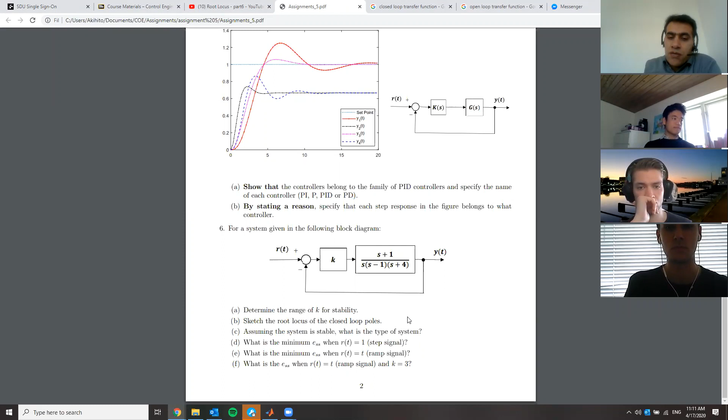So as long as the system is stable, the type is the same. Yes. What we should make sure is that the system is stable. But if we know that the system is stable, then it's not a matter of K. It depends on the zeros and poles. So I don't want to give you the answer, but it's not related to K. Okay.

Another question, I was just solving this one right before. When the system is marginally stable, the locus, does it cross the j omega axis? Yes. Okay. Just one. Yeah. And by the way, can you scroll up? Because you have it open.

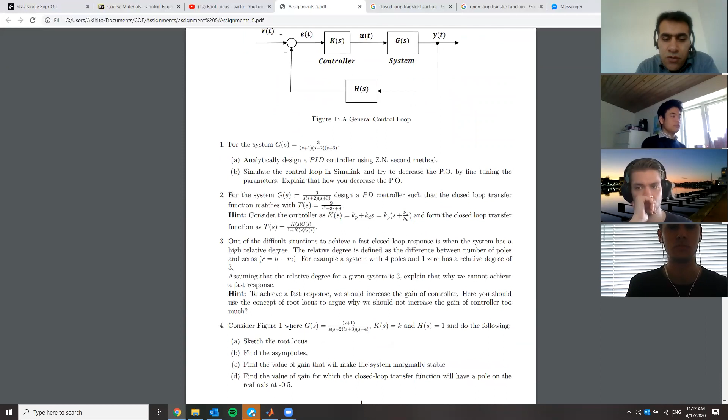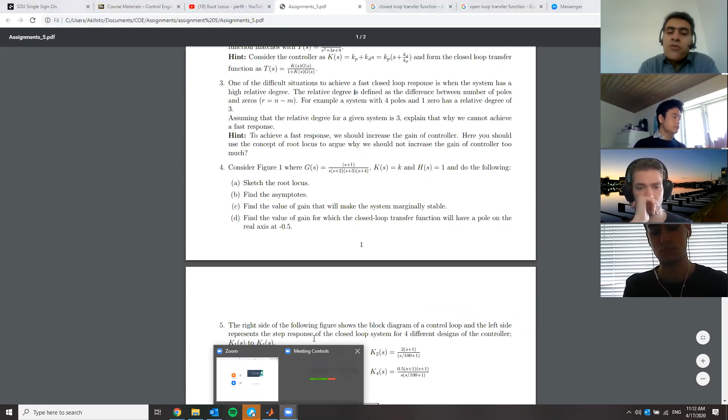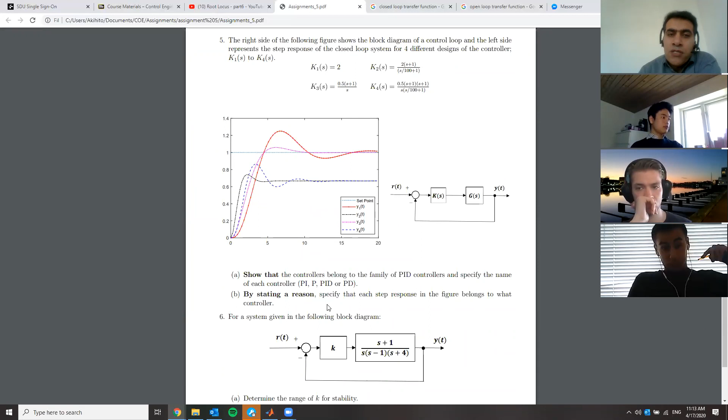The first question was one of the questions of a final examination. I don't know what year. The same for question 2. Not question 3. 1 and 2 were in the final examination. Also 4. And if you scroll down, yep. Also 5 and also 6. So other than 3, the other questions were in the final examinations of past years. Okay. Just to give you an idea how the examination looked like.

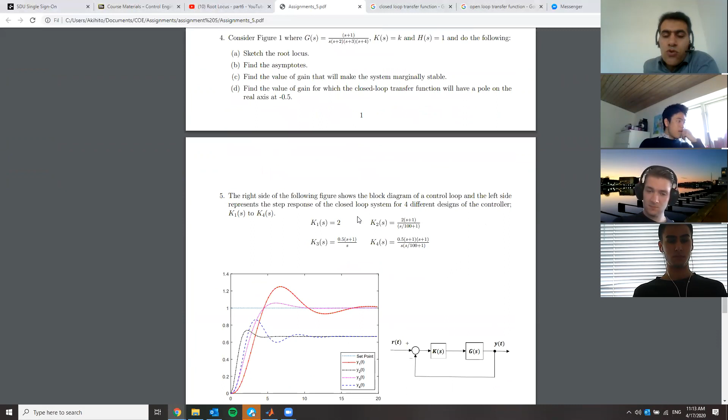For question 1, can I just use root locus to find where it passes the jω axis? Yeah, you can. Okay, thank you. You don't need to draw the root locus, but if you want, you are welcome. Okay, thank you. Can it also be done by trial? I mean, I tried a couple values of K and I found... No, you shouldn't do that, because analytically means that you should solve it on paper, theoretically.

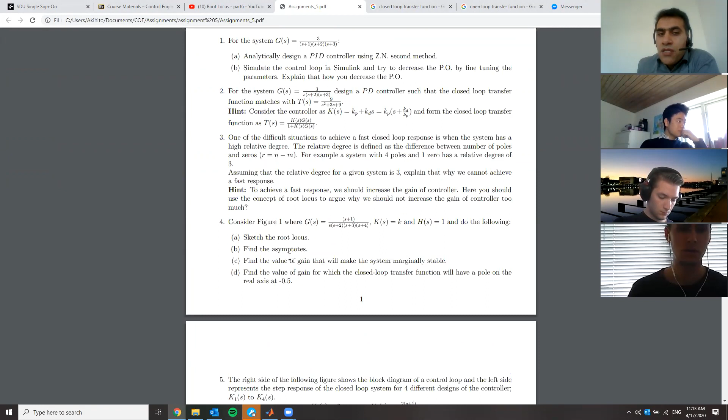Yeah, I did the question on paper, but then for the value of K, I tried a couple values and I got it. But this is not analytically. This is by simulation. Part A, when it says analytically, it means that you should solve it on paper, theoretically, using the Routh table or the other method I showed. Yeah, but for that we need to find the value of Ku, which is when we have a pure sine wave. Okay. And to do that, we need to test until we get a sine wave.

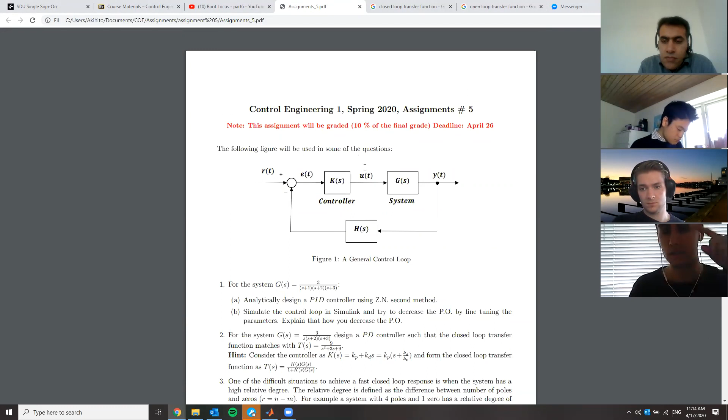No. This is what I'm trying to say. There are two different methods to find that pure sine. One of them is theoretical. It means that you go and find the K such that two poles are on the j omega axis. If the poles are on the j omega axis, for sure the step response would be a pure sine. Okay. For yourself, you can test it just to make sure it is okay, but you don't need to. And the other method is by simulation or by experiment, but this question is asking you to do it theoretically.

Okay. So just to make sure, the wave will become a sinusoid when the poles are on the j omega axis, no? Yes, it does if the other poles of the closed loop transfer function are on the left side. Okay.

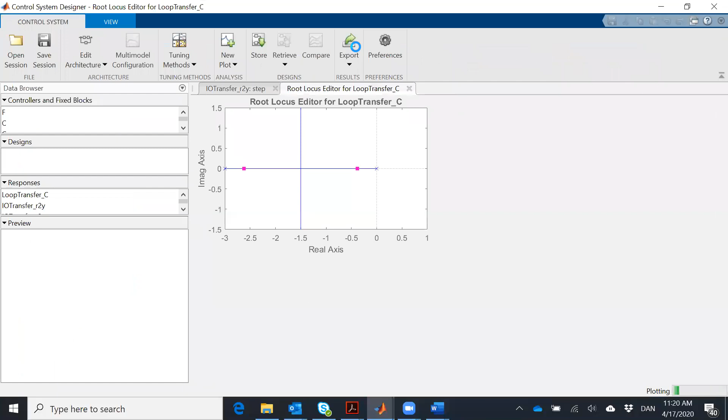Hossein, how does MATLAB handle it if you have a K value inside of the formula as well? How can you get MATLAB to understand what you mean? What do you want to do? In one of my equations, I want to check if I got the right value. But there's a K inside of it, and there's a 0 as well. I think it was question 4C or something like that. I just wanted to check if I got the right answer, but I couldn't get MATLAB to do what I wanted. Still, I didn't get what you are looking for.

But you can define a symbol as K, the function is syms, and if you type here K, I'm not sure if this is the function. Yes, it is. Then K plus 1 will give you K plus 1. You don't need to assign a number to K. You can work with K as a parameter. But I'm not sure if this is what you are looking for. Yeah, and then I had a 0 pole as well, but I couldn't write the code for MATLAB to handle it. But I didn't use syms K, so maybe that's why. Okay. I will try again.

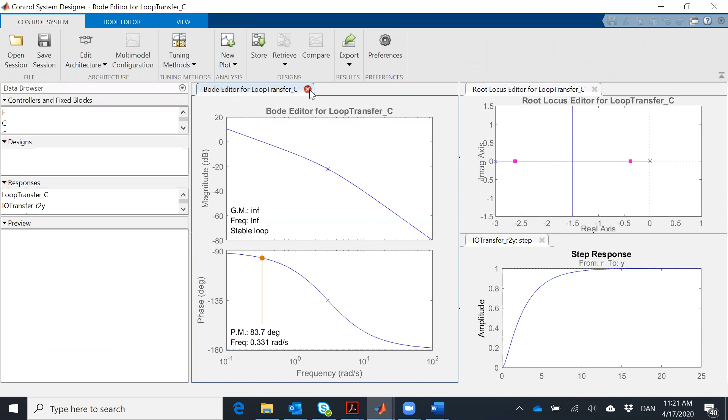Okay. When I type the SISO tool function of the transfer function, this window popped up. This figure on the left is in the frequency domain. For now, just close it. If you go to view and the left-right view, on the left side you have the root locus. On the right side, you have the step response of the closed loop system. Remember, this one is the root locus of the loop gain, and this one is the step response of the closed loop system.

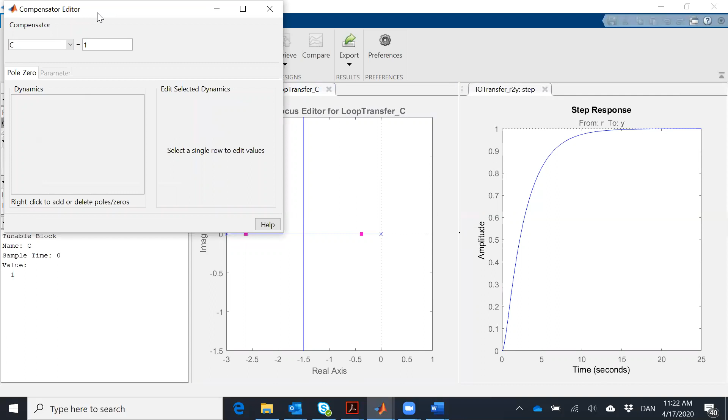And the controller, if you double click here, is just a gain for now, but you can add zeros and poles later. Right now the gain is 1, and we have one open loop pole at 0, the other open loop pole at -3, and this is the root locus. The poles are moving towards each other, and then they leave the real axis exactly at -1.5. So when K is equal to 1, these red squares show where the closed loop poles are: one pole here, another pole here.

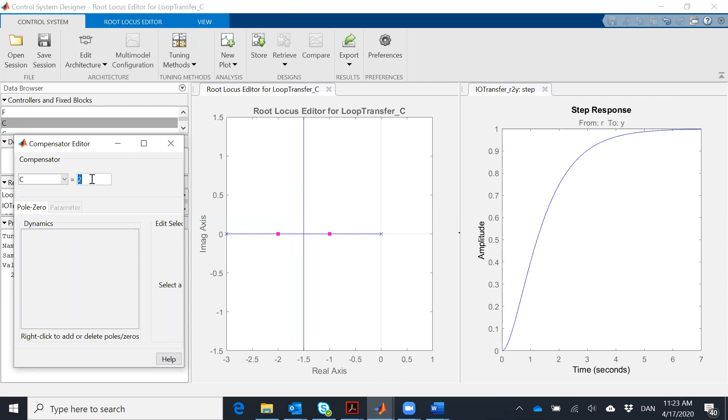If you increase K, this pole will go to the left, the other one goes to the right. At some point, they meet each other here. If you increase K more, they will separate and be complex, not real anymore. I can change K here. If K is 2, did you notice that they moved a bit towards each other? If I change it to 3, now they have reached each other and left the real axis. I can continue this procedure. On the right side, you can see live what is happening to the step response.

Is that clear? Okay. Yes. It's not that different from when I am recording your video without any audience. You get a yes at least. Yeah, okay, thank you.

For MATLAB, do you need certain toolboxes to run this? Because it says four toolboxes are missing. Really? Okay. Then my recommendation is that you install it, because you do need that. I might even ask you to solve a question in the examination using SISO tool.

Can you show your code for 1 second again? Yeah. It's just a SISO tool and then the transfer function. Yes, thanks. It gives me some error in line 2 or line 3 for some reason, but I don't know. Maybe you're missing the star between. No, the line above. This one.

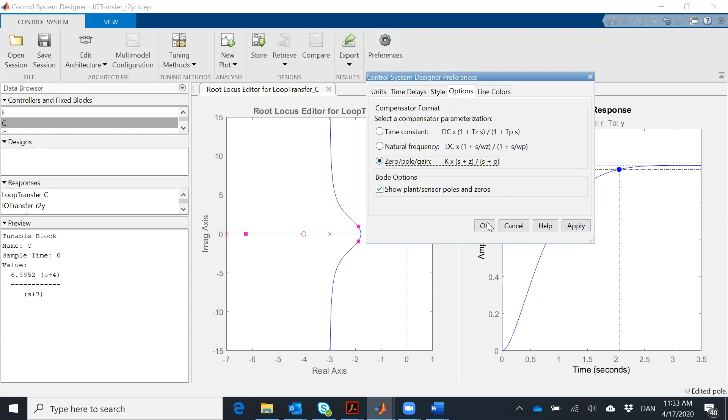Just to get the representation of the controller as we expect. Where should we go? Yeah, okay, this one is what we expect here. But when you double click on C, it is different. There is somewhere that we can change the representation, maybe here in the preferences. Yes, I think it is here. Options. If you click on preferences and then select zero pole gain and press OK. Now if I open the controller, you will see the controller has one zero at -4 and the pole of the controller is at -7. I haven't designed the pole yet.

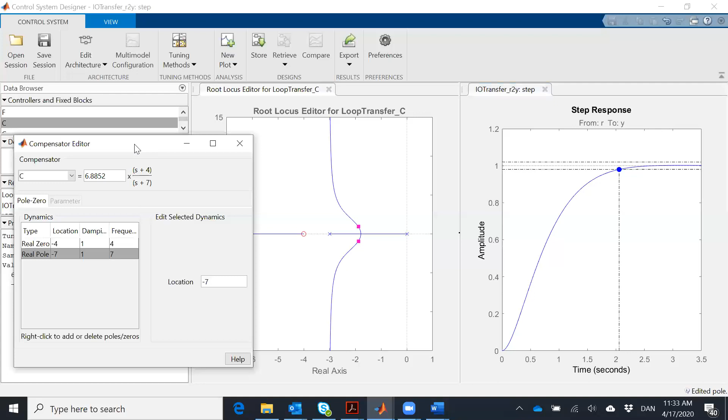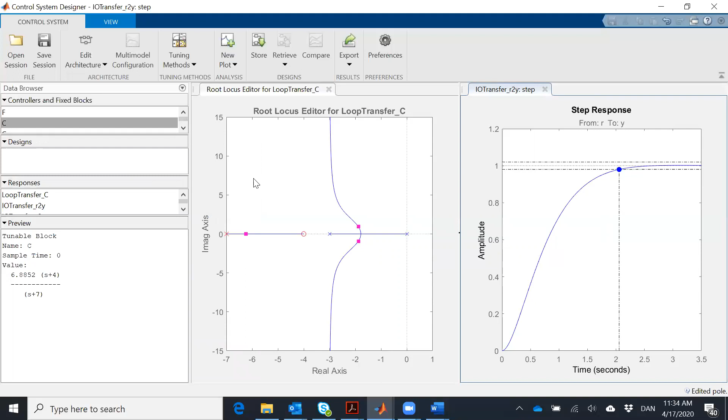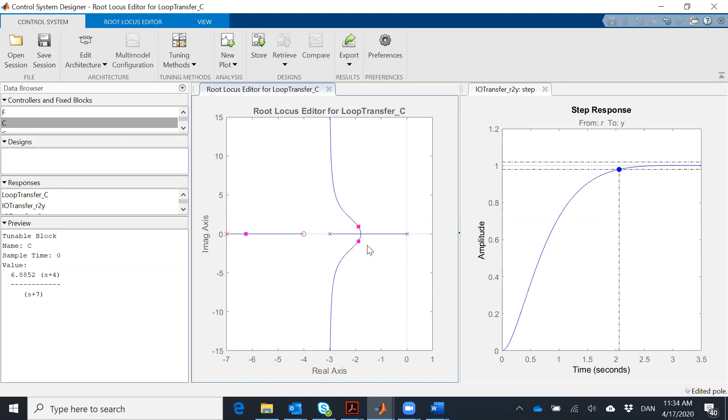I'm going to show you how to design it. So in the root locus, if you right click, you have one item called design requirements, and if you select new, here you can, for example, specify what the settling time should be. So settling time should be less than 1 second. It is exactly what I have done in the lecture. So press OK.

I don't know if you can see that, but part of the space is shaded. It means that the pole should not be in this region. It is a bit different from what I do. In the lecture, I shade the region of interest for you. But in MATLAB it is the opposite: the shaded part is the part that the poles should not be in. But that's okay, we know what we are doing.

I can see that the line that is dividing it is not exactly located on 4. Is that a thing of the software, or is it actually a little bit next to 4? Yeah, exactly, that's a good point. It's because this 4 divided by zeta omega n is not an exact equation. It is an approximate equation, but it is not that far.

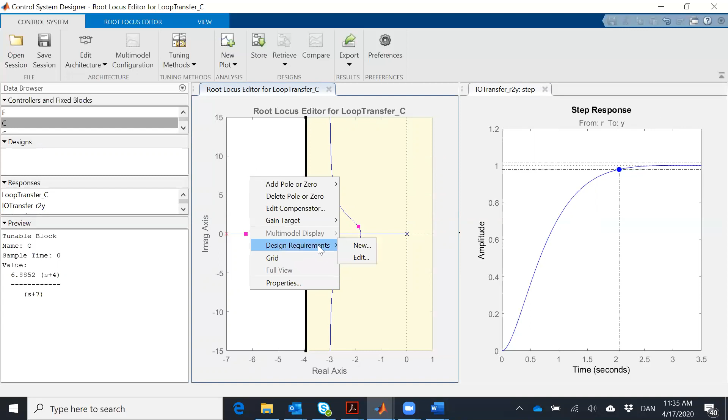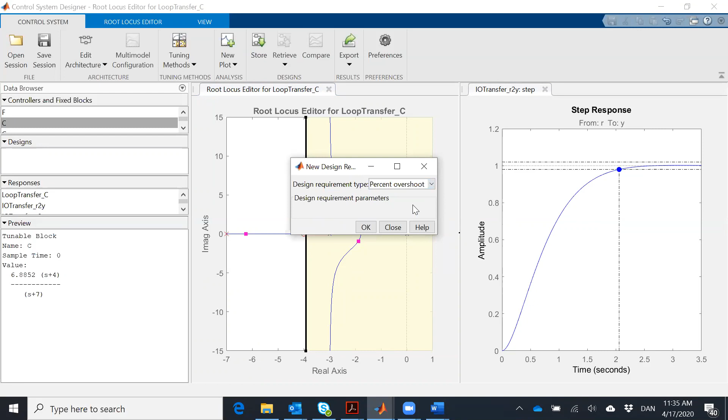And then next, again select design requirements, because in the lecture there was another requirement as well: percent overshoot, and this one is supposed to be less than 9. So type 9 here, press OK. Is it clear what I'm doing? Yes. From here, we only need to adjust K, right? No, the pole is not adjusted.

Why is the pole not adjusted? Because I selected the pole at -7, but in the lecture I calculated the pole such that the root locus is passing through this point. You see that it's not passing here. How to make the root locus pass through this point? In the lecture, I explained that when we have these two requirements, usually we select the corner points as the desired place for the closed loop poles. It means that the root locus should pass from here. To make it happen, you can click on the pole, hold it, and then move it to the left.

I'm actually moving the pole to the left, and whenever you get the root locus to pass through that point, then it's the right position for the pole. Is that clear?

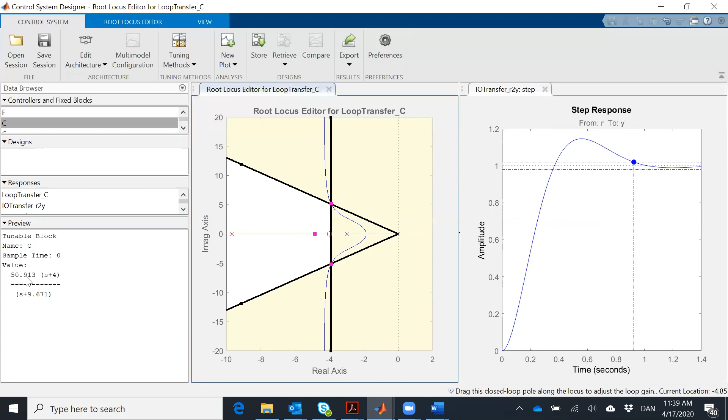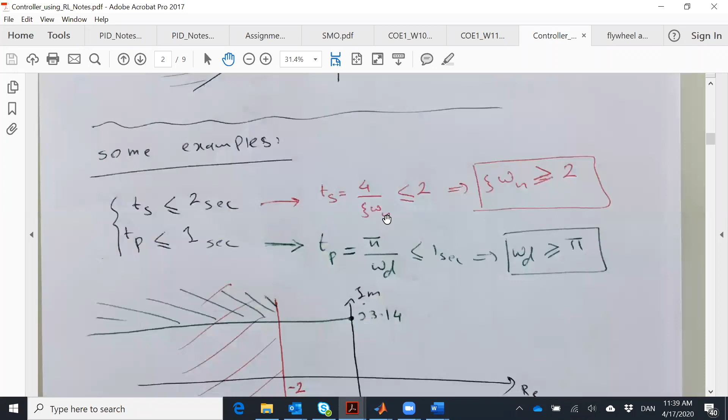Roughly, we are there. As far as I remember, in the lecture, I calculated that it was 53 point something, or we are checking it. I have a question. Yes, I can open the lecture as well. Yeah, in MATLAB, can you come back when you're done with this? Give me a second to see. Yes.

53.5. Yeah, thank you. Yes, 53.5, and the pole was 9.82. This small deviation is because we are checking by eye. If you want the exact value, you can also type in here 53.5, and the pole was 9.82, if I remember correctly. Yeah. 9.82.

Yeah, and if you check here, actually it is not exactly at the line, and the reason is that this line is not exactly at -4. It is slightly to the right. But this is a small variation, it doesn't matter, so it is still okay. Sorry, let me finish this one as well, then I will come back to you.

Yeah, no, it's fine. And here, if you check, the settling time is less than 1 second, and the percent overshoot is not 9%, it is a bit more than 9%. You can right click here, characteristics, and then peak response. If you check the peak response, it is 1.15, which means that the percent overshoot is 15%, but we were expecting 9%. Do you know why?

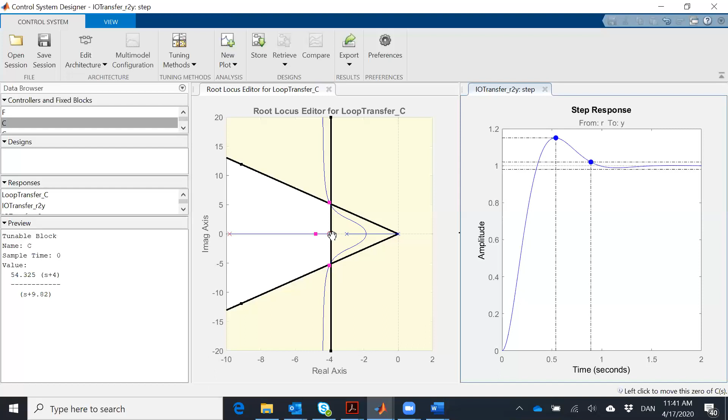The reason is that these equations are written for a second order system, but the system you have is third order because you have 2 poles here and 1 pole here. So even though we have 2 poles here and we are expecting to have 9%, because of the third pole, and also there's a zero here, they changed the specification to some extent. But if you want to get exactly 9%, you can move the zeros and poles slightly

and make it what you exactly want. So if I move the zero a bit to the right, just to show you that you can improve it. It is getting less. It's now 12% and the settling time is less than 1. Okay, so by moving the zero to the right, or you could also have some other options.

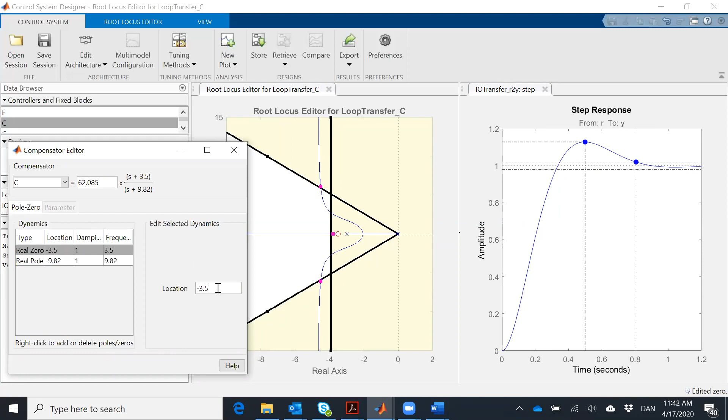But Hossein, I can see that in the region of interest, we have 2 poles that were outside of the region of interest. I have brought them inside now. So now it should be less than 9%, no? No, because the system has 3 poles. Those equations are for 2 poles, and in the design we only take care of these 2 poles. But the third pole is also affecting the system. So it doesn't matter if the third pole is in the region of interest.

It's a very good question. Because for that specific gain, the third pole is here. Can you see the square here? Yeah. And it is very close to the zero. Okay? Yes. Because you have a pole and a zero very close to each other, they more or less cancel each other. So they have not much effect on the final result, but you can see the effect now.

Yeah. So if it would be exactly... Yeah. Sorry. If there wasn't any zero here, then the effect would be much more. But because of the zero, it is not. It is actually negligible. Okay.

It's a very good method to design a controller for any system, because at the same time you can check the step response, see if the conditions are fulfilled, and refine the design. But you should notice that even though you have access to this SISO tool, you should still be able to solve the problems by hand, because if you are not able to do that, then you are not able to analyze what you get.

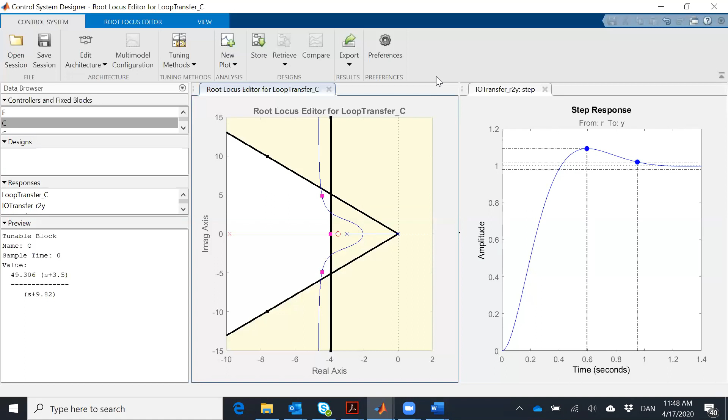I have a question about the lecture. Okay, could you open it? Let me share the screen again. Which page? Page 4. My question is why here the desired pole is only -1 plus j1.33 and not -1 minus j1.33?

Both of them are the desired poles. But if your question is about how I found k, applying only one of the poles is enough. You have a polynomial, and in this particular case it has 2 roots, so it doesn't matter which one you select, you will get the same k. You can also try the other one, -1 minus j1.33; you will get the same k. Okay. And also on page 8.

Again, in the lower part of the graph, on the vertical green line, you only draw one triangle. Yes, there should be another one here. Okay. That was it then. Thanks. No problem.

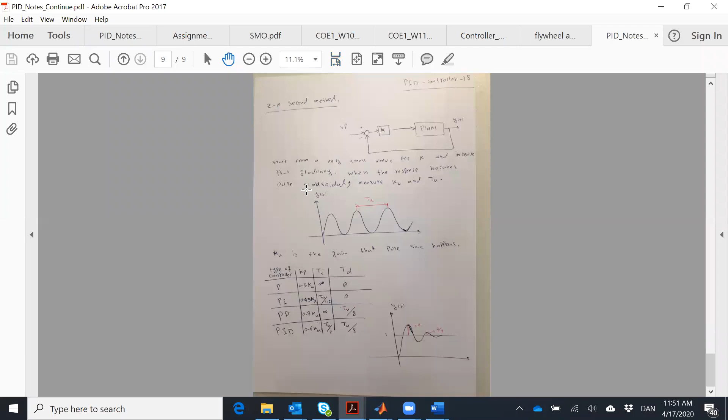It's because I understand how to do the second method by testing in Simulink, but I don't really understand how to do it analytically because there is no example of that. So I'm not sure how to do it. I did an example, didn't I? No, there was no example of analytical analysis. I mean, you got the K value in Simulink and then you showed how to do it, but not how to get the value directly here.

No, in Routh-Hurwitz I showed you. Yeah, in Routh-Hurwitz, yeah, but not in Ziegler-Nichols second method. Yeah. In Routh-Hurwitz I showed you an example. Because I left it for Routh-Hurwitz, I wanted to give you an intuition why we can use the Routh-Hurwitz table. Yeah, this is an example I have done. Can you see that? Oh, okay.

Yes. And with two different methods, I showed you how to calculate KU and TU. It was using the Routh table and also using another method, which some of the students actually prefer to use. Oh, okay. So yeah, that's all.

That's also my doubts. I have a question regarding the closed loop. When we calculate KU and W for the closed loop, we have to get the transfer equation, right? Of the closed loop system. One more time, sorry. Yeah, to get the value of K, we need to get the equation of the closed loop system, and then we use the denominator of the transfer function, and we make that equal 0, right? Yes. But when you make the transfer function, it's KG(s)H(s) divided by 1 plus KG(s)H(s). Yes. If I just take 1 plus KG(s)H(s), is that the same as doing the whole thing?